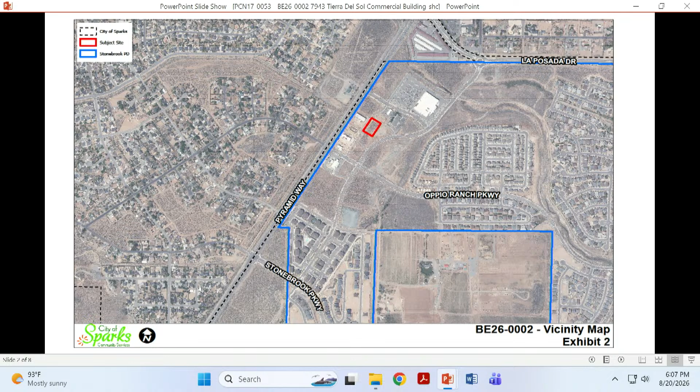As such, the Planning Commission reviews the proposed architecture for conformance with the handbook's architectural standards. The applicant plans to submit a request for an administrative review for the proposed commercial building soon. The site plan shown here indicates the primary access is from a private street identified as Turtle Dove Court. There will be 25 on-site parking stalls, including 2 required ADA accessible stalls, and a fully enclosed trash area. As required by the Stonebrook Planned Development Handbook, the proposed design has incorporated an outdoor patio, as well as planters with trellis and lattice features into the design to create a pedestrian scale relationship.

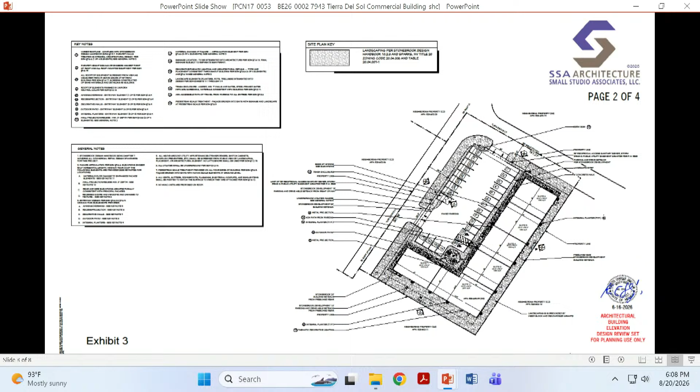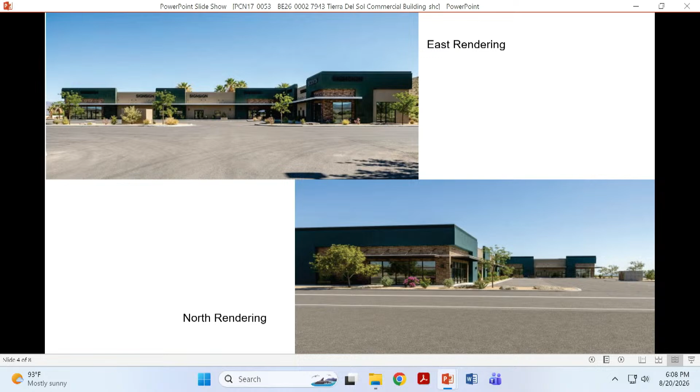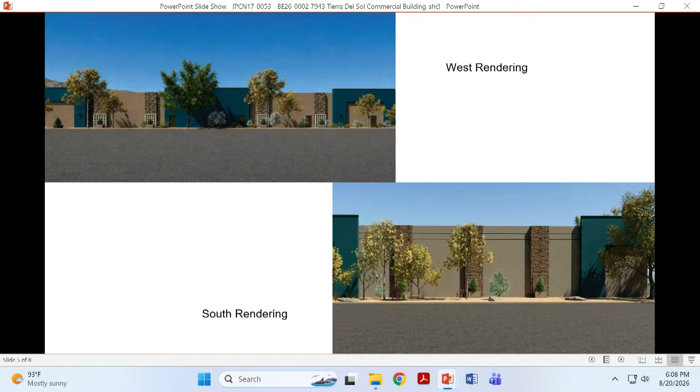These images are of the elevations of the proposed commercial space. The east elevation will be visible from the Les Schwab and other existing commercial buildings along Pyramid. The north elevation will be visible from the Wendy's and the Jiffy Lube. The west elevation will be visible from the adjacent future office development along Tierra del Sol Parkway. And the south elevation will be visible to future commercial development.

As required by the Stonebrook Handbook, the proposed design has incorporated a mix of approved colors and materials throughout all sides of the building. The applicant proposes a light brown Texas leather for the stucco, a deep sea green for the metal projections, with a darker Cascade green at the roof line, as well as Eldorado San Marino limestone for the stone veneer.

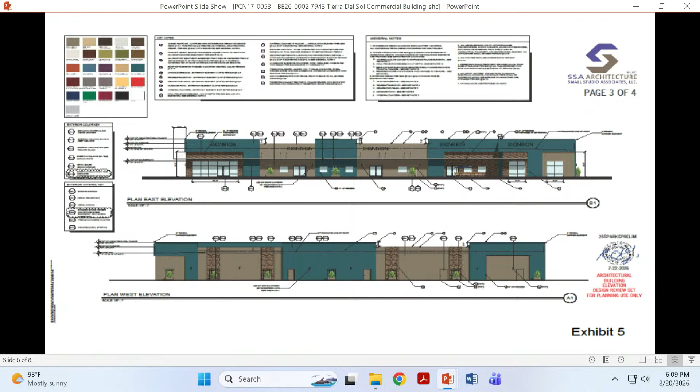Staff believes the proposed commercial building elevations comply with the standards in the Stonebrook Final Design Standards and Regulations Handbook and recommends approval by the Planning Commission. This concludes my presentation, and I am happy to answer any questions.

Thank you. Does anybody have any questions for Kim? Okay, seeing no questions for the planner, is the applicant here? They are not, but they are available by phone if we need them. Okay, does anybody want to talk to the applicant? No? Okay, thank you. And if we could have a motion?

Madam Chair, I move to approve the architectural elevations for the proposed 11,214 square foot commercial building proposed in BE 26-0002 in fulfillment of the requirements set forth in the Stonebrook Final Design Standards and Regulations Handbook.

Second. Okay, we have a motion by Commissioner Kramer and a second by Commissioner Nieberlin. Please cast your vote. Oh, sorry, thank you. Discussion? Is there any discussion? Okay, seeing no discussion, please cast your vote. Okay, and the motion passes.

7.2 PCN 04051 STM 26-0001.

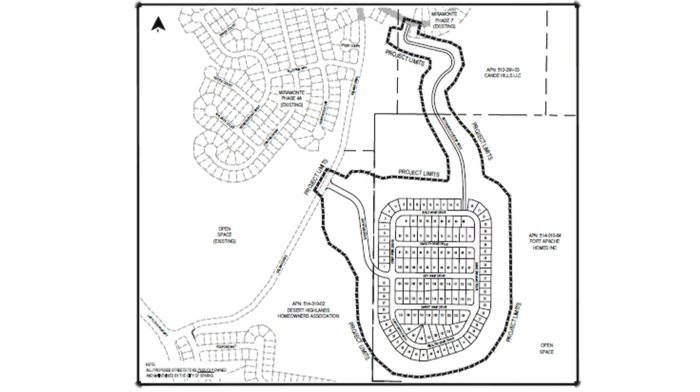There we go. The entire Miramonte plan development was evaluated for compliance with the city's standards for development on slopes, hilltops, and ridges when the handbook was adopted in 2005. Land disturbance to accommodate development of the 8 phases was found to comply with a maximum amount of disturbed area based on slope gradient, and the handbook includes various standards that govern grading and revegetation, including but not limited to use of slopes with a gradient of 2:1 to limit the length of cut and fill slopes, slope matting and natural seed mixture requirements, and hillside adaptive techniques to limit the visual impacts of grading.

The proposed primary road to the site will cross a sizable drainage way that runs along the west side of the site. To facilitate construction of the primary access road, Red Wine Drive, earthen fill up to 50 feet in depth will be constructed with culverts to convey stormwater. The hydrology analysis demonstrates this road embankment does not meet the definition of a dam under state regulations, as was potentially the case with the 2017 townhome tentative map. The road section allows stormwater to drain freely, retains water for less than 24 hours, and can safely pass the volume of runoff produced by a 100-year, 24-hour storm without overtopping.

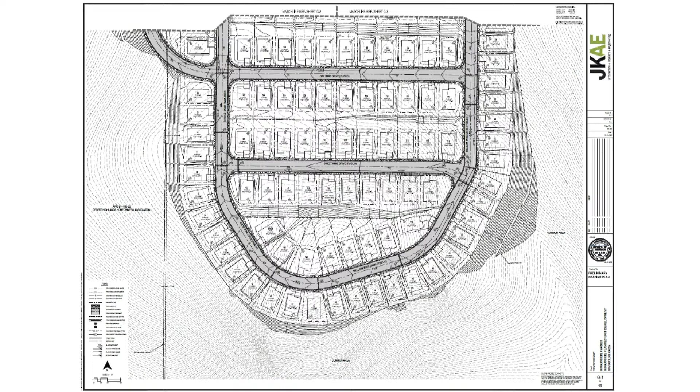As proposed, the tentative map for Miramonte Phase 8 complies with the maximum allowable disturbed area set forth in the handbook, as well as handbook requirements related to slope gradients and revegetation. This slide here shows the proposed site plan. Although the site is designated as LMDR 14, the subdivision is proposed to be developed with single-family or SF6 design standards provided in the handbook. As designed, the project conforms to the handbook's SF6 design standards.

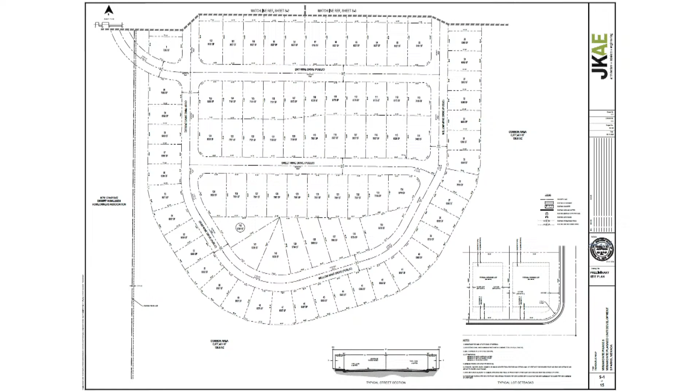So this slide shows the proposed landscape plan. Preliminary landscape plan submitted with this request shows formal landscaped areas and revegetated slopes. The handbook defers to the Sparks Municipal Code for landscaping standards for residential development. Each residential lot will have front and rear yards with 1 tree per standard lot as a minimum and 4 trees per corner lot as a minimum. Landscaping strips, a minimum of 5 feet in width, are located on the exterior of corner lots, and residential sidewalks and responsibility for maintenance shall be assigned with the final map.

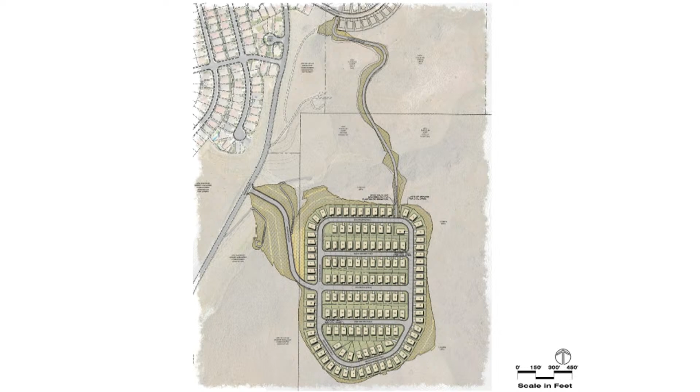So there's an updated traffic impact analysis provided with this application that estimates 142 detached single-family homes will generate 1,291 average daily trips, with 99 of these trips in the AM peak hour and 132 of these trips in the PM peak hour, based on ITE Trip Generation Manual, the 12th edition. Compared to the 448-unit townhome subdivision approved for this site back in 2017, this level of trip generation represents 1,080 fewer average daily trips, 72 fewer AM peak hour trips, and 74 fewer PM peak hour trips.

The updated traffic impact analysis did not recommend any changes to the established road network, and city staff concur with its findings. So with the background and analysis done, we can move on to the findings that the Planning Commission must consider this evening. The tentative map request is for a 142 lot, single-family detached subdivision.

The proposed subdivision will provide additional residential units in Sparks consistent with the Sparks Comprehensive Plan, advancing goals MG6, H2, H3, and policies MG11 and H2. This tentative map plans show sidewalks will be provided on both sides of the local and collector streets, providing access to the lots, complying with policy C4.

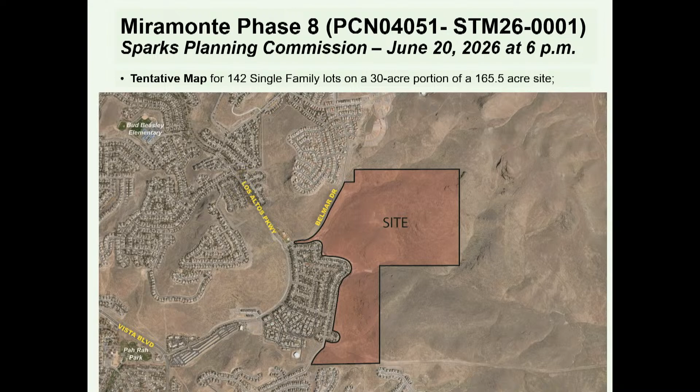Good evening, Madam Chair, Commissioners. John Krmpotic, I'm with KLS Planning, representing DR Horton, the applicant. As I shared at the study session, we're completely happy with the staff report and have been working with staff on the conditions as proposed. I did send in a PowerPoint if you wanted me to go through it, but I don't need to. We're here for any questions. We have leadership from DR Horton with us, and our civil engineer Ken Anderson has done a phenomenal job on this, so we're very pleased with where it's at, unless you'd like me to go through the PowerPoint.

How long is the presentation? No, I'd move right through it. Would Joe like to see the presentation? I don't know, no, we're okay. Fine, thank you very much. Are there any questions for him? No? Okay, very good, thank you. Appreciate it.

And this is a public hearing? No. No? Okay.

Chair, I'd like to make a motion to forward a recommendation of approval to the City Council for the tentative map request STM 26-0001 associated with PCN 04051, adopting findings T1 through T12 and the facts supporting these findings as set forth in the staff report, and subject to conditions of approval 1 through 18.

We have a motion by Commissioner Reed and a second by Commissioner Lieberman. Is there any discussion? Seeing none, please cast your vote. The motion is approved. Thank you for being here.

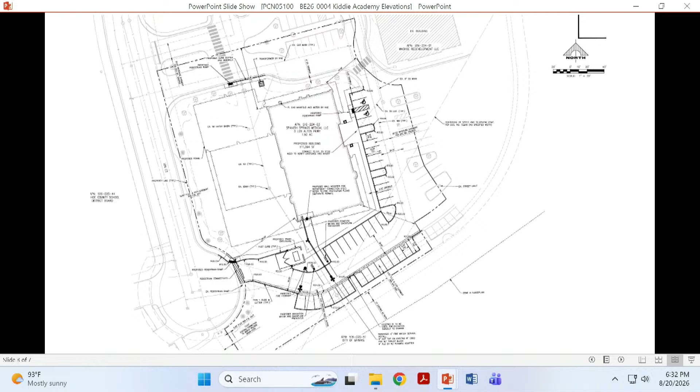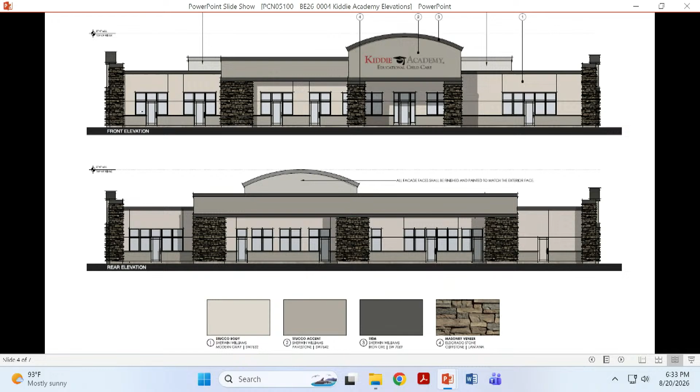The handbook's Office Park Development and Design Standards require buildings to be aesthetically pleasing and compatible with materials and colors used in adjacent buildings. The front of the proposed building will be oriented to the east and will face away from Ion Drive. The applicant proposes a modern gray stucco building facade with iron ore trim, a Pavestone stucco accent, and an Eldorado stone cliffstone masonry veneer.

Staff has reviewed the color and material palette and finds that it is compatible with the established architectural character of the surrounding office park. Section 4AC1 of the handbook requires that the proposed building be reviewed for conformance with the design standards of the handbook by the property owner, which is Spanish Springs Medical LLC. Exhibit 5 in your packet is a copy of this approval letter.

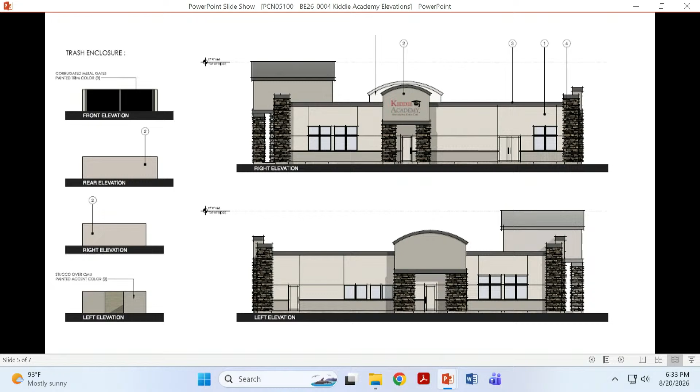Overall, city staff recommends approval of this building elevation request. Staff finds the proposed building elevations comply with the Office Park Development and Design Standards of the Kiley Ranch South Planned Development Handbook. Additionally, staff finds that the proposed building design is aesthetically pleasing and is compatible with materials and colors used in adjacent buildings of the Kiley Ranch Office Park. That concludes my presentation, and the applicant, Justin Rowe, is available if the commission has any questions.

Okay, very good. Does anybody have questions for Kim? Okay, and is the applicant here? Would you like to speak? No? Okay. Does anybody have questions for the applicant? Okay, seeing no questions.

We can have a motion. Madam Chair, I move to approve the architectural elevations for the proposed 11,170 square foot childcare building as proposed in BE 26-0004 in fulfillment of the requirements set forth in the Kiley Ranch South Planned Development Handbook.

And I second. Okay, we have a motion by Commissioner Priestos and a second by Commissioner Rawson. Is there any discussion? Okay, seeing no discussion, please cast your vote. Very good, the motion passes.

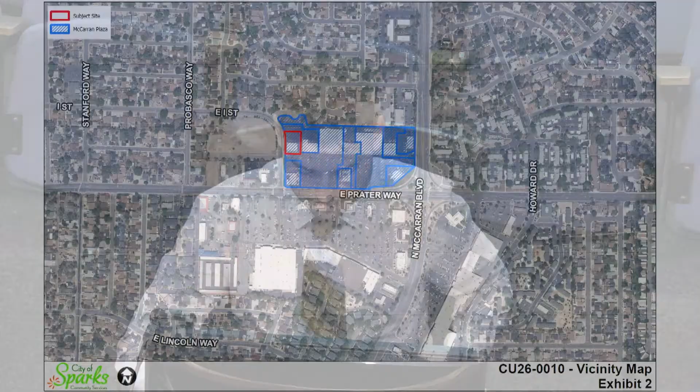There we go. Good evening, Chair, members of the Planning Commission. For the record, Kobe Glano, planner with the City of Sparks. This item is a request for a conditional use permit to allow for the operation of a billiards parlor or a pool hall in the MUD, MUC zoning district, or mixed use district, mixed use commercial, on an 11.5 acre site located on the corner of North McCarran Boulevard and Prater Way.

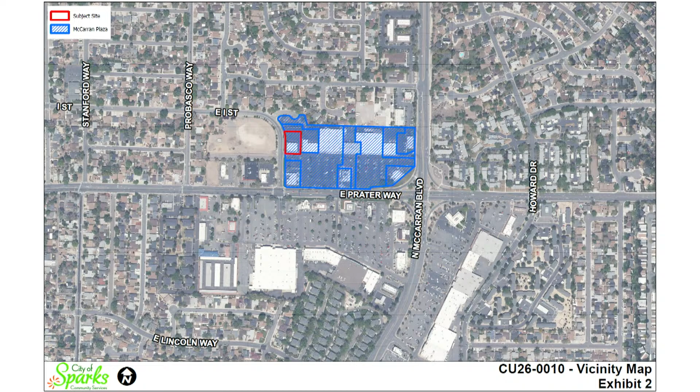The proposed billiards parlor falls under the minor recreational facility use as defined in Sparks Municipal Code, which is contingent upon approval of a conditional use permit by the Planning Commission. The project site is currently developed with 6 commercial buildings totaling approximately 86,030 square feet, which contain a wide variety of commercial uses. The applicant is proposing to occupy a 4,542 square foot tenant space within the northwestern commercial building.

The previous use of the tenant space was Pure Country, which operated both as a bar and a dance hall. As proposed, Shark Den is a billiards parlor facility providing pool tables for open play, league play, and tournaments in conjunction with a bar or lounge use. Here's some photos showing the existing building on the screen.

Staff analyzed 3 main components with this request: access and parking, traffic, and compatibility. Primary access to the project site is provided from existing driveways on East Prater Way and East I Street. Sparks Municipal Code requires 1 parking space for every 200 square feet of gross building floor area for a minor recreational facility use. Based on the 4,542 square foot tenant space, the proposed use requires 23 parking spaces. In total, Sparks Municipal Code requires 282 parking spaces for all existing and proposed uses within the commercial center. The site currently provides 485 shared parking spaces serving all of the existing tenants.

According to the trip generation letter provided with the application, the minor recreational facility use is estimated to generate a total of 183 daily weekday trips and 362 weekend daily trips, with 29 of those trips in the PM peak hour. This estimated level of trip generation is below the threshold of 80 peak hour trips that would require a full traffic study. City transportation staff has reviewed the trip generation letter provided by the applicant and had no objections to the findings.

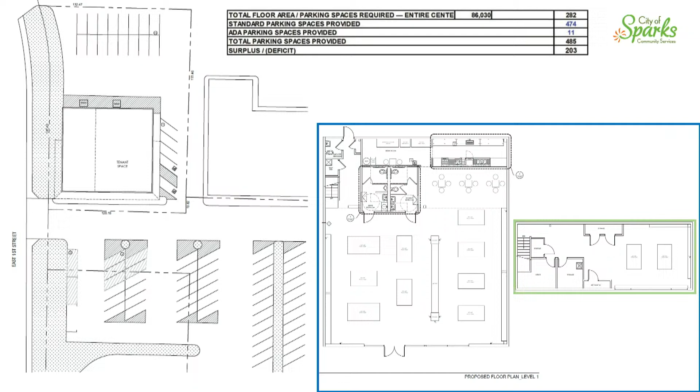With the background analysis concluded, I'll transition over to the 5 required findings, all of which staff can make.

For finding C1, use of the subject site as a pool hall directly provides Sparks residents with access to recreation in support of policy CC7. The proposed use supports goal MG2 by expanding recreation opportunities available within the city and encouraging reinvestment in existing commercial centers. In addition, allowing the proposed use within an appropriately zoned commercial development supports a locally operated business in accordance with policy EV6.

For finding C2, staff believe the proposed minor recreational facility is compatible with the surrounding land uses because it'll occupy an existing tenant space without expanding the current commercial footprint or modifying the site's access. The subject site is located in an established commercial shopping center that has historically accommodated a wide variety of retail, restaurant, bar and lounge, financial institution, medical office, and personal service uses.

Surrounding properties are generally developed with a mix of commercial uses, with an undeveloped property owned by Truckee Meadows Water Authority and a commercial center to the west, an apartment complex located further to the east across North McCarran Boulevard, and a commercial center to the south across East Prater Way. However, existing single-family residences are located to the north, approximately 220 linear feet away. For these reasons, staff believes finding C2 can be made.

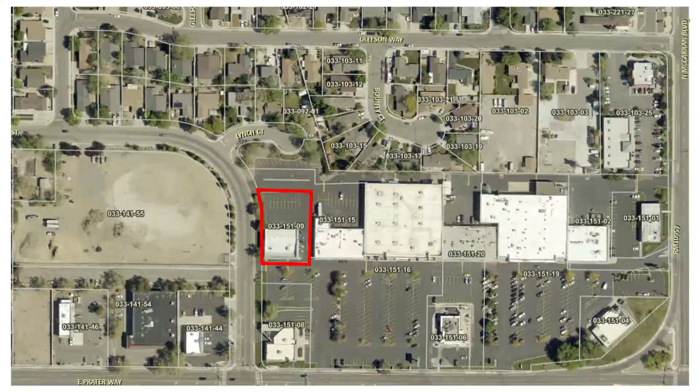For finding C3, the potential impairment of natural resources and the total population which available natural resources will support without reasonable impairment was previously considered when the site was assigned a mixed-use commercial land use designation within the city's comprehensive plan. City staff does not believe approval of this conditional use permit will impair the availability of those natural resources.

Finding C4 relates to mitigating impacts through conditions. The applicant has indicated that operational hours will generally occur between 12 p.m. and 12 a.m. Monday through Thursday, and between 9 a.m. and 12 a.m. Friday through Sunday.

Staff is proposing condition of approval number 5 to limit the hours of operation -- excuse me, I have a typo here -- for the pool hall to be from 9 a.m. to 1 a.m. Monday through Sunday. This is intended to allow flexibility for the applicant's operations while still mitigating noise from late night operations.

Proposed condition of approval number 6 requires all event activities associated with the proposed pool hall occur indoors within the existing building, unless a temporary use permit is obtained at least 7 days prior to an outdoor event, in accordance with the applicable provisions of Sparks Municipal Code for outdoor events. In addition, the application for the temporary use permit would need to include a parking plan to make sure the site is able to accommodate all of the parking.

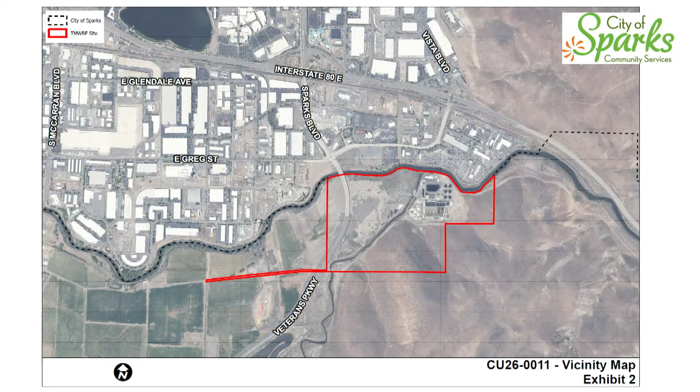The project site for the proposed dewatering facility is located at the rear of the TMWRF facility, shown here at the southern end, right along this area. Over on the left, you can see the location of the existing dewatering building. The proposed project includes the construction of the new dewatering facility, including an approximately 8,600 square foot dewatering building, cake storage silos, an odor control system, an electrical yard, and associated utility infrastructure.

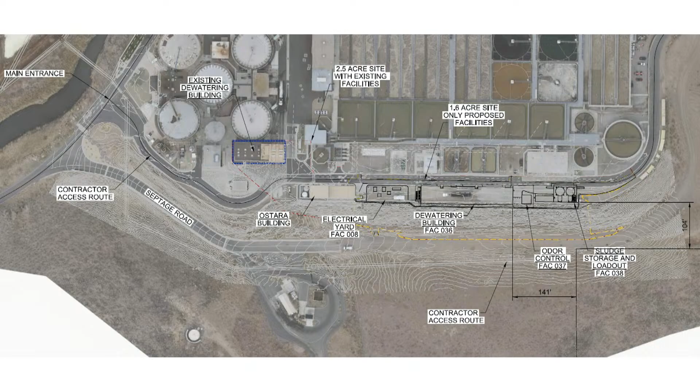For some background, TMWRF has been in operation serving the city and region since 1967. In the 1980s, the existing dewatering facility was constructed. The TMWRF site was annexed into the city of Sparks in 2009 and given its underlying CF master plan land use designation and PF zoning designation.

Dewatering is the process in which pollutants removed during wastewater treatment are centrifuged and concentrated into a biosolid product suitable for landfill disposal. If you have questions about what this all means, we have Director Casey Menser available for any technical questions about this process. A major utility use is for larger utility uses such as a sewer treatment facility or a power plant. A major utility use is permitted in the PF zoning district with approval of a CUP.

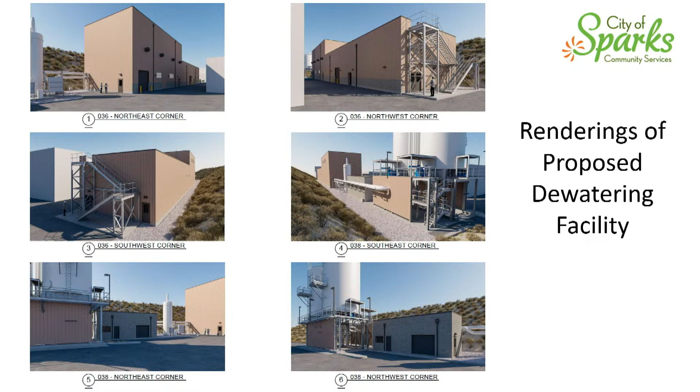TMWRF was legally and lawfully established prior to the adoption of the Sparks Municipal Code. However, it's considered substandard in part because it does not meet landscaping requirements in the current code. Because the new dewatering facility will be taller than the existing facility, the proposed project is considered intensification of a substandard development. Typically, this would trigger a landscaping requirement.

The Sparks Municipal Code allows for changes and enlargements to a substandard development without providing the required proportion of landscaping when considered through the CUP process, and proposed changes are not detrimental to the public health, safety, and welfare.

For sites located in the PF or Public Facilities Zoning District, the Sparks Municipal Code requires 20% of the site to be formally landscaped. In addition, SMC requires 1 tree for every 500 square feet of minimum landscaped area, 1 tree for every 30 feet of public street frontage, and 1 tree for every 7 parking spaces. For the 2.5 acre project site where the dewatering facility is proposed, a total of 21,780 square feet of landscaped area, and approximately 45 trees would be required.

Installing landscaping on the TMWRF site is highly challenging due to the facility's unique operational, safety, and environmental conditions. Because of how the facility was developed over several decades to serve the region, existing site constraints would force any required landscaping to be placed along the perimeter of TMWRF.

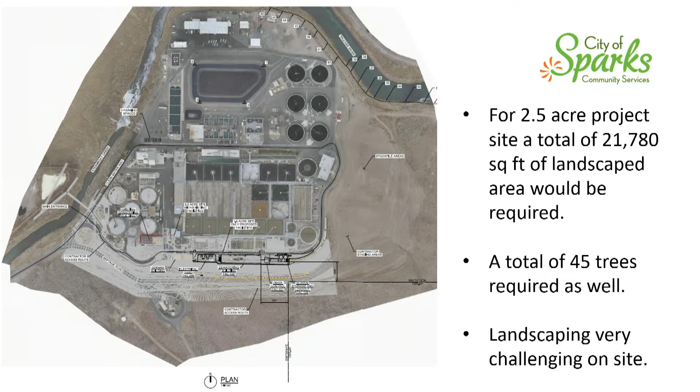Now to the 5 required findings for a CUP. The proposed dewatering facility, without the generally required amount of landscaping, advances Goal CF1 by upgrading critical city-owned infrastructure to meet current operational needs and preparing TMWRF for future water capacity demands. The project resolves longstanding space constraints by relocating dewatering operations from a confined, non-expandable building to a more suitable footprint capable of supporting both current functions and future growth.

The project further supports Policy RC2 and Goal RC2 by strengthening TMWRF's ability to meet federal and state water quality standards for the Truckee River and improving the facility's resilience to environmental changes, including extended droughts and extreme weather events. By upgrading a modernized shared infrastructure, the proposed project supports Policy CD12, which calls for cooperation among regional partners to maintain and improve joint use facilities. Enhancing the dewatering system strengthens the reliability and performance of the overall TMWRF, which serves multiple jurisdictions and relies on longstanding interagency coordination.

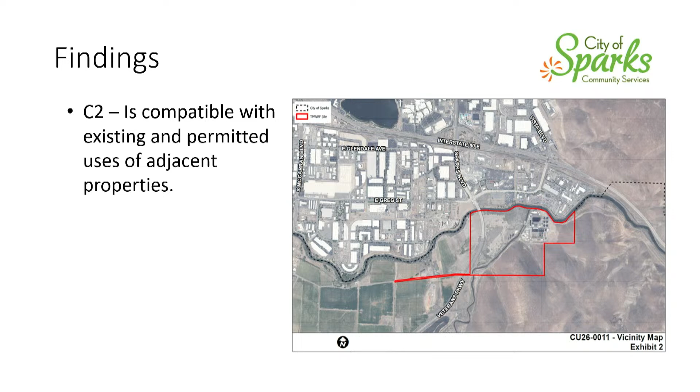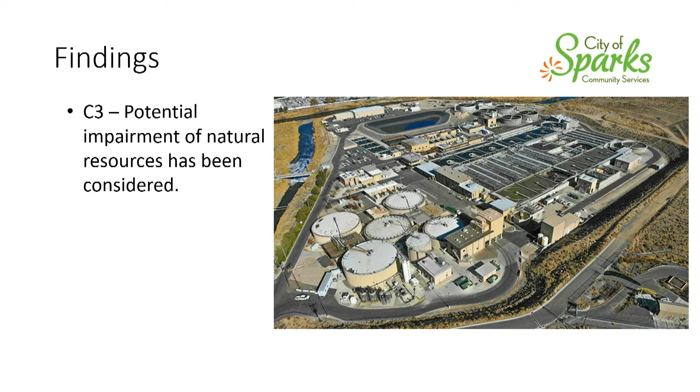Finding C4 looks to address identified impacts. Proposed Condition of Approval number 5 requires the applicant to submit colored architectural elevations that are in substantial conformance with those included in the CUP application.

During review of this CUP request, the Sparks Fire Department provided several formal comments regarding the proposed project. These comments address technical assistance requirements, automatic fire sprinkler and fire alarm systems, fire department connections, hazardous materials review, and necessary fire apparatus access, water supply, and construction-related permits. Proposed Condition of Approval number 6 requires the applicant to comply with all fire department comments to the satisfaction of the fire marshal prior to issuance of a certificate of occupancy for the dewatering facility.

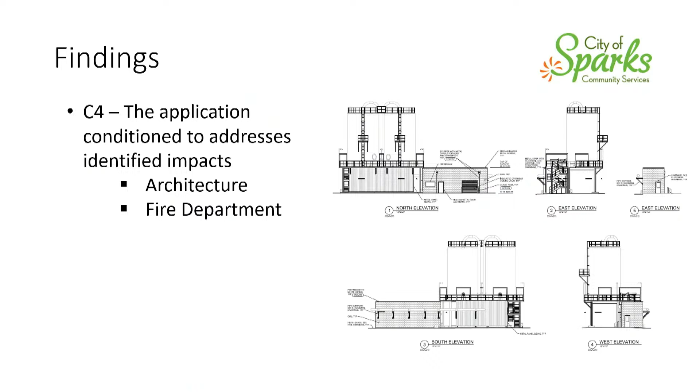Finally, public notice was published in the Reno Gazette Journal on August 6th. Notices were also mailed to 50 owners of property within 500 feet of the subject property on August 4th. Staff have not received any public comment or inquiries related to this project.

Overall, city staff recommends approval of the CUP request. Staff believes the proposed major utility and proposal to intensify a substandard development without providing landscaping are in conformance with the goals and policies of the comprehensive plan, is compatible with adjacent uses, and will not adversely impact the health and safety of residents, visitors, and businesses within the city.

Based on the operational constraints, extensive subsurface infrastructure, and security considerations of the TMWRF site, staff find that providing the generally required landscaping would not serve as a buffer for neighboring uses and is not operationally feasible. That concludes my presentation. Director Menser is here along with members of his team, and the recommended motion is on your screen.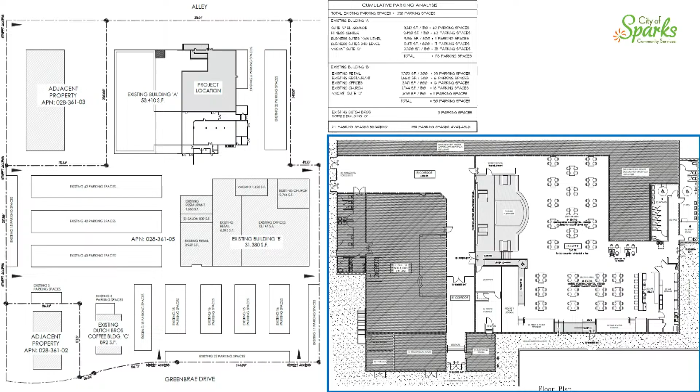Moving on to the five required findings the Planning Commission must make in order to approve, all of which staff can make.

For finding C1, the proposal does not require expansion of the existing buildings or public infrastructure, and all necessary public services are currently available to serve the site, consistent with policy CF1. The proposed use would advance policy EV2 by broadening Sparks' entertainment and social event offerings. These gatherings often draw extended family and guests from across the region, bringing visitors who may not otherwise travel here. Allowing the proposed use within an appropriately zoned commercial development also supports a locally operated business in accordance with policy EV6.

For finding C2, the subject site is located in an established commercial shopping center that has historically accommodated a variety of retail, restaurant, office, health club, and personal service uses. The surrounding properties are developed with a mix of commercial uses, a park to the west, and an apartment complex located to the northeast of the site. Staff believes the proposed event center is compatible with the surrounding land uses because it will occupy an existing tenant space without expanding the existing commercial footprint or modifying the site.

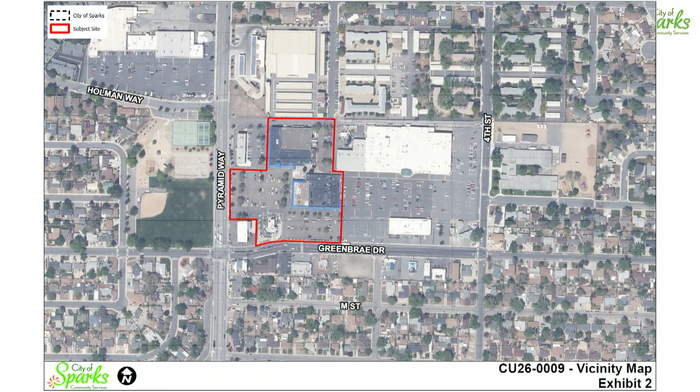Operational impacts related to parking and hours of operation are addressed through the conditions of approval, and for those reasons staff believes finding C2 can be made.

The potential impairment of natural resources, and the total population which available natural resources will support without reasonable impairment, was previously considered when the site was assigned a commercial land use designation within the city's comprehensive plan. City staff does not believe approval of the CUP will impair the availability of those natural resources. Finding C4 relates to mitigating impacts through conditions.

Proposed condition number 5 limits the approved hours of operation for the event center from 10 a.m. to 1 a.m., Friday through Sunday, while allowing the existing bar and lounge to continue operating as otherwise permitted by right within the C2 zoning district.

Proposed condition of approval number 6 further requires all event activities to occur within the building, with limited accommodations for food trucks and outdoor catering associated with scheduled events. These conditions are intended to minimize potential impacts to surrounding businesses and nearby residential properties while allowing the proposed use to operate as represented by the application.

Proposed condition of approval number 6 would also restrict food truck and outdoor catering for events from extending beyond 10 p.m., and would limit food truck or similar outdoor catering operations to the area outlined in blue as shown on the screen.

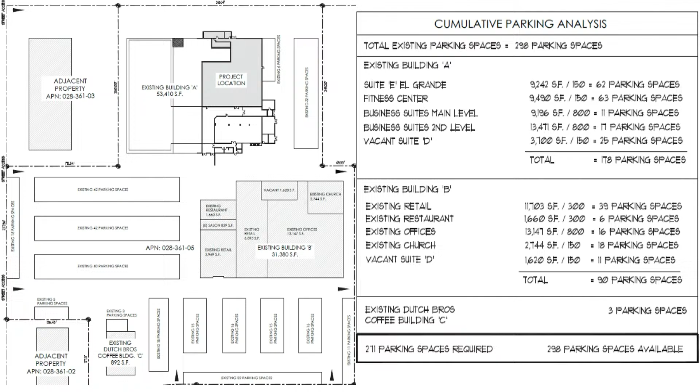For finding C5, public notice was sent to 85 property owners and published in the RDJ on August 6, 2026, as prescribed by NRS and the Sparks Municipal Code. As of today, staff has received 1 public comment via email, which has been provided to each of you. Staff believes the required findings can be made and recommends the planning commission approve the conditional use permit. I'd be happy to answer any questions.

Okay, thank you. Are there any questions for Kobe?

Commissioner Sperber, could you repeat the question again? The capacity of this when the banquets are actually being held and stuff like that. The applicant has stated that their operations are approximately 300 people, but the actual capacity of the building based on the building code is higher than that. We did check it based on the public comment that came in, and that would be 468 persons. That's exactly what I'm getting at. Thank you.

Okay, any other questions for Kobe? Okay, I do have one.

So there is a restaurant on site that they'll utilize, and the food trucks are if they have outdoor events? Or is that a separate thing? So there's a restaurant on site for their banquets, but the food trucks is where I'm getting confused. So if they have outdoor events, the food trucks are part of their operation, or?